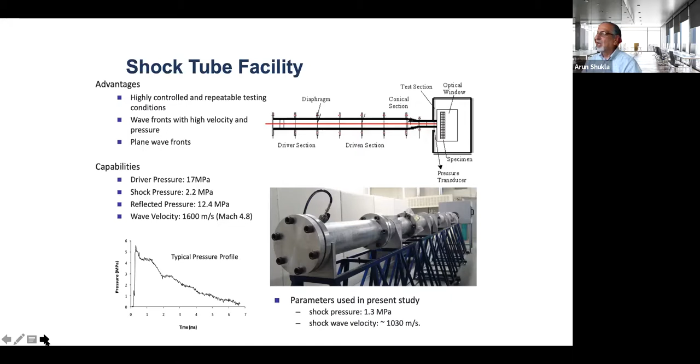In the next slide, this is a video, I hope it runs here. I think in this video, this is a shock tube on the right-hand side. This target is a sandwich composite that we were studying, with two companies involved - one was Material Science Corporation and then the 3TEX Corporation in North Carolina. Material Science Corporation is in Pennsylvania. We were looking at how we can improve the performance of such sandwich structures for naval applications.

I'm not sure whether we can run this video from control here. I think if you click on this image, it should run.

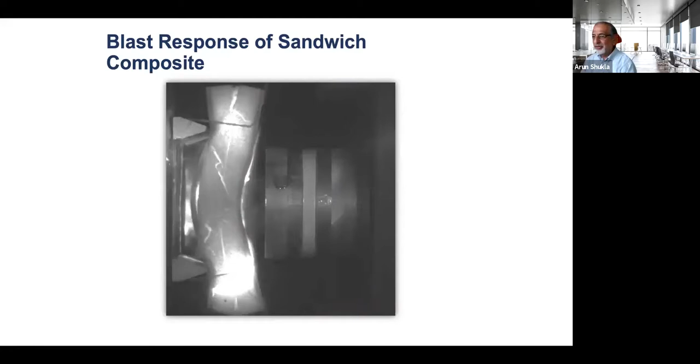Just click on there, it should run. You'll see a shock coming from the right-hand side. You see this glow here, shear cracks forming, delamination, and finally the sandwich structure falls apart.

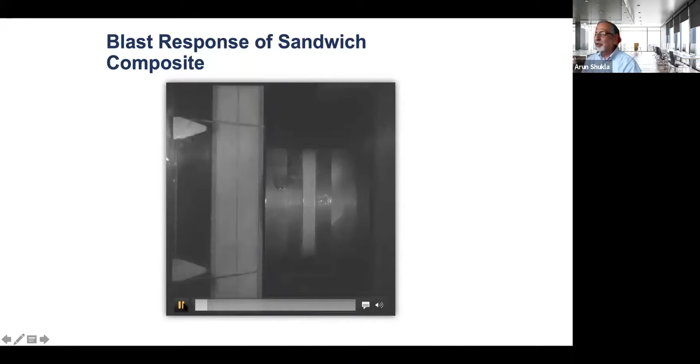What I wanted to point out is that when the shock comes and hits this target, you have very high temperatures. That's why this air ionizes and begins to glow. With this high-speed photography incorporated here, we can really probe the structure in a lot of detail and try to design it.

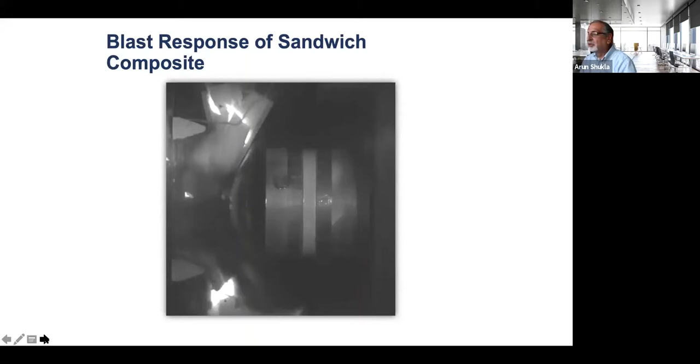We designed a structure with funding from ONR and for these companies that is probably one of the best I've seen around the world. So with this, let's go to the next slide.

We have in our lab some of the highest speed cameras you can think of, cameras that can take 200 million frames per second. We bought a system of cameras recently that can do 10 million frames per second at very high resolution. So we have those kinds of capabilities in the lab to do unique work for our defense agencies, particularly Homeland Security, ONR, and Air Force are interested in this kind of work.

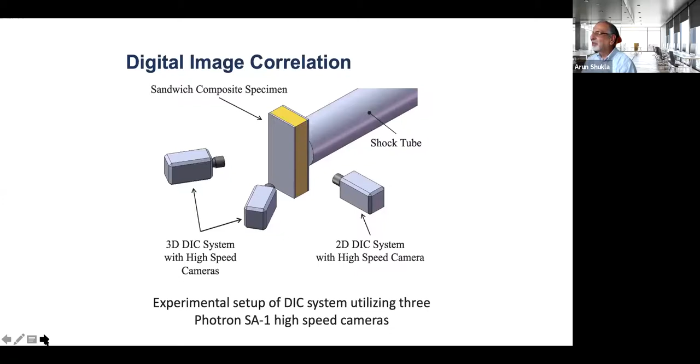Similarly, we can create low temperatures also in our facilities here. Okay, we'll go to the next slide.

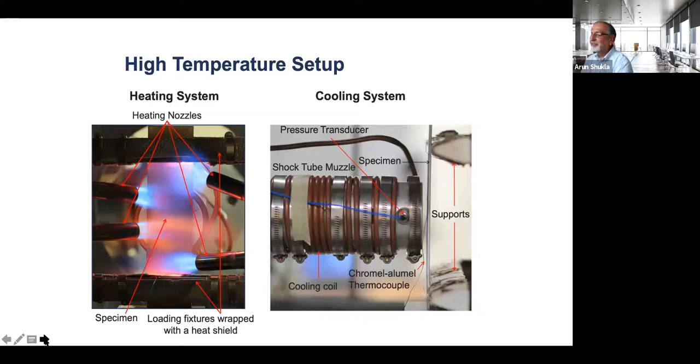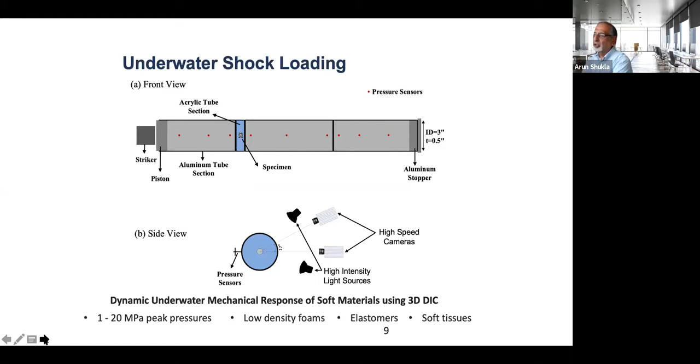We have this facility also. We are currently using it for studying materials for the Office of Naval Research and Naval NUWC here. But we also have a project from the Medical Research Facility of the Navy looking into soft materials. These materials could be foam materials or could be biological materials like tissue and hydrogels and things like that.

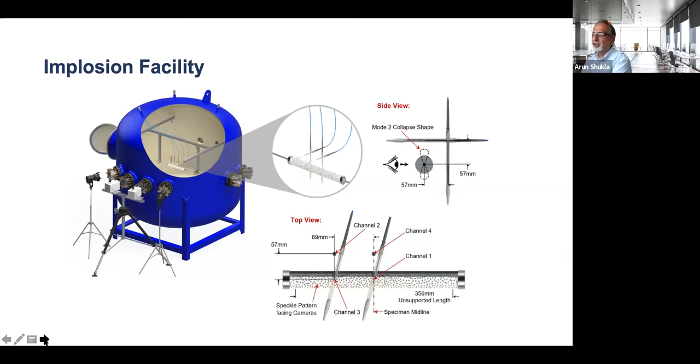If you go to the next slide, you will see that a little bit better. This is an image of an implodable, and Eric would appreciate this. This is a tube made of composite material that, as you increase the pressure and take it underwater deeper and deeper, it implodes.

With these dots that you see here, these help us in probing the structure in real time and help us design these structures in a better way. I'm going to stop at this point and let Helio take over from here, okay?

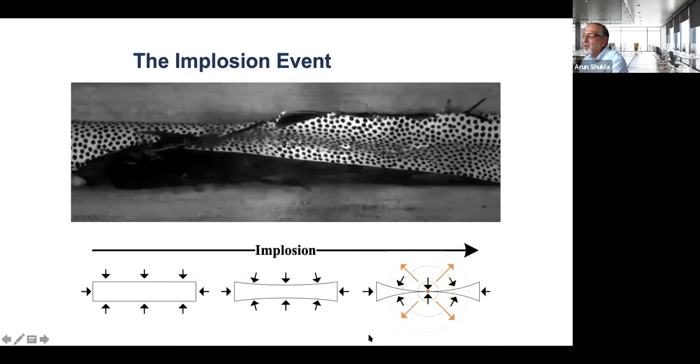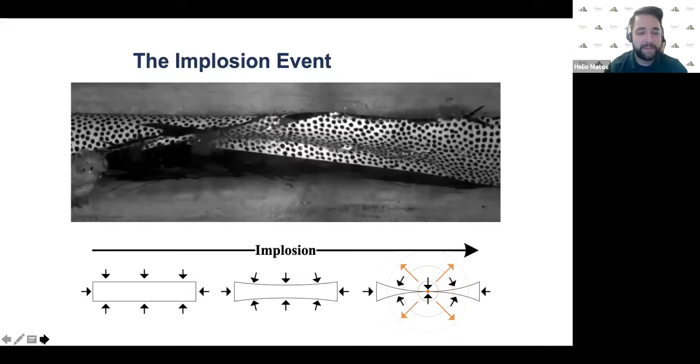So I'm just going to continue the discussion that Arun Shukla started, and I'm going to talk about some of the additional facilities we have in the Dynamic Photo Mechanics Lab.

This one shown on this slide is the split Hopkinson pressure bar. What this does is it allows us to test specimens under very high strain loading conditions. This is the facility mentioned earlier that can get up to 10 to the 6 strain rate, conditions that mimic the rate of loading of asteroids. What's shown here is a specimen in compression between two bars. We have a striker bar that sends a pressure pulse that interacts with the specimen, which is sandwiched between the incident and the transmitted bars.

But we also have the same pressure bars that can do tension and torsion experiments. In addition, we can have specimens cooled or heated between negative 40 Celsius and 1,200 Celsius for metallics.

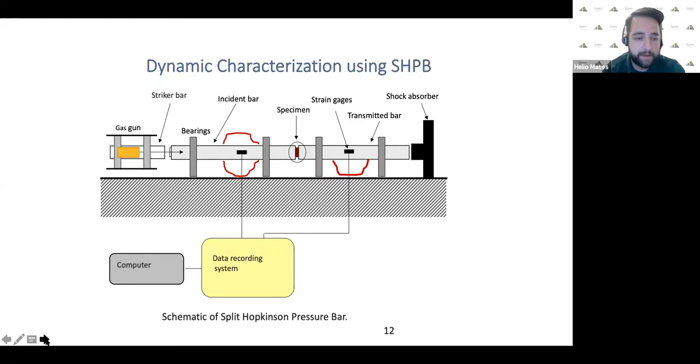In this next slide, we are showing one of our newest facilities. This is an impact tower tester. This is a stock photo, but the facility we have in the lab also has an environmental chamber within the striker. This is for compression testing, and we can move the striker between 1 and 20 meters per second. We can also do temperature testing between negative 40 Celsius and 150 Celsius, so the entire environmental chamber would be within that temperature.

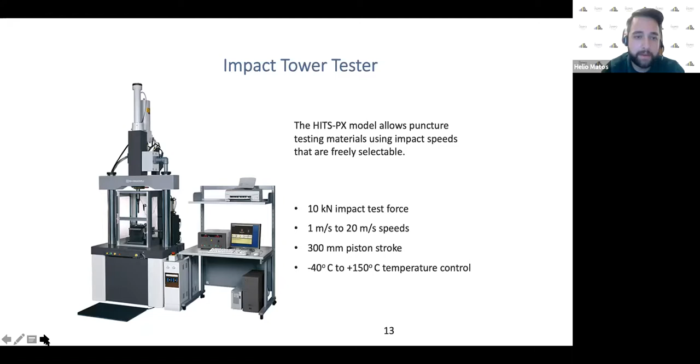In the next slide, this is an image of one of the previous projects we had with the Army, where we're designing armor material. The material shown here, though not in great detail, is a composite with a sandwich core. What you're seeing is a still image of the bullet right before it makes impact with the composite. So we also have the capability of doing ballistic experimentation in the lab.

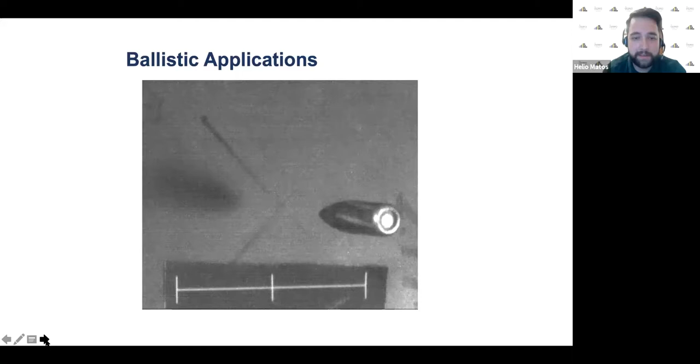In the next slide is our two weathering facilities. The first one, shown on the left, is an ultraviolet weathering facility. We place our material in there to simulate exposure to sunlight at an accelerated rate. The acceleration rate depends on the specific material we're testing. But what we can also do, shown on the right, is accelerated weathering through water infusion of salt water.

This diagram shows a multitude of variations of this facility. The one shown here is just for when we place the specimen in a saline solution. Typically we have it at 3.5% sodium chloride, which is about the average salinity of the oceans around the world. We have heaters that heat deionized water to keep the saline water at a constant temperature. The temperature we set this to depends on the material.

Typically we stay below the glass transition temperature so we're not changing the mechanical properties by introducing very high temperature. At the same time, we want to be as high a temperature as we can below this transition zone so we can get higher acceleration rates.

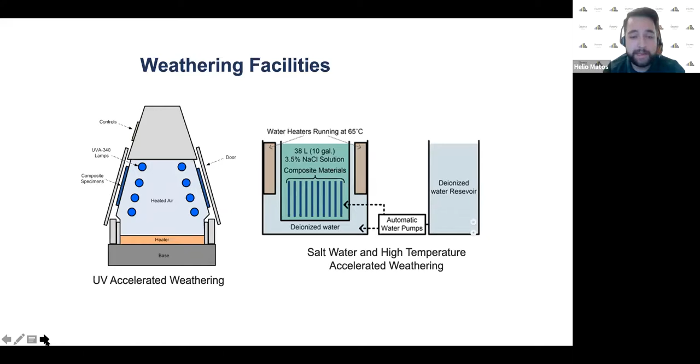On the next slide, we have another variation of the saltwater weathering facility shown here. We have the same saltwater bath, and this large stainless steel canister is where the specimen sits inside and is pressurized. So now we're introducing another variation that would increase the absorption rate, allowing us to get even higher acceleration rates while still staying below that glass transition temperature.

So instead of mimicking 5 to 10 years within a month, depending on the material, we could mimic something between 10 to 20 years or even higher if we let the material soak in this water for longer.

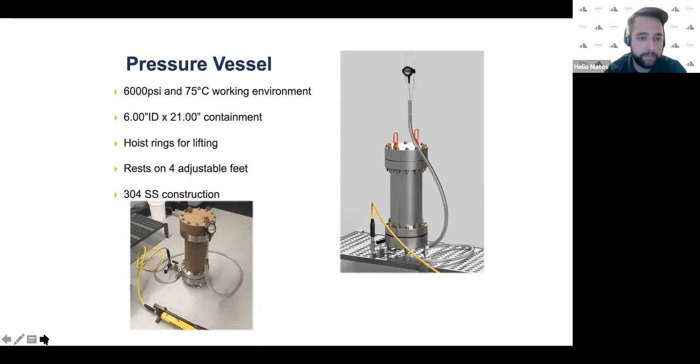In the next slide, we have another piece of equipment added recently to the lab, a dynamic mechanical analysis machine called DMA. We can do material characterization between negative 150 C and 600 C. Also, the loading rate is up to 200 hertz, and what that translates to in terms of strain rate depends on the geometry of the material. But we can essentially do a strain rate sweep.

So we can start at quasi-static loading and go up to 200 hertz, and that would give us a dynamic performance of the material, and we're getting stiffness as well as any viscoelastic behavior of the material. And this complements the split Hopkinson bar, because we're getting only the elastic properties of the material there, whereas the split Hopkinson bar mostly gives us the large deformation or plastic deformation of the material. So between these two equipment, we can get a robust material model for a wide range of temperatures and loading conditions.

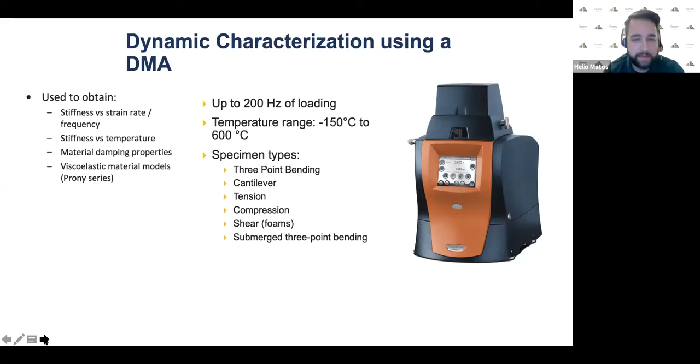In the next slide, we can also do some composite manufacturing in our lab, mostly at a smaller scale than many of the companies that are here. But for experimentation-sized specimens, we could make our specimens, then test and characterize them ourselves. We can do vacuum infusion using fabrics and liquid resin, or also just use prepregs. Right now we're mostly doing flat specimens, but we can also make tubes by roll wrapping prepregs, or curved specimens if there's a mold for it.

And I think that sums up most of the capabilities in the lab. We do have some variations of many of these equipment.

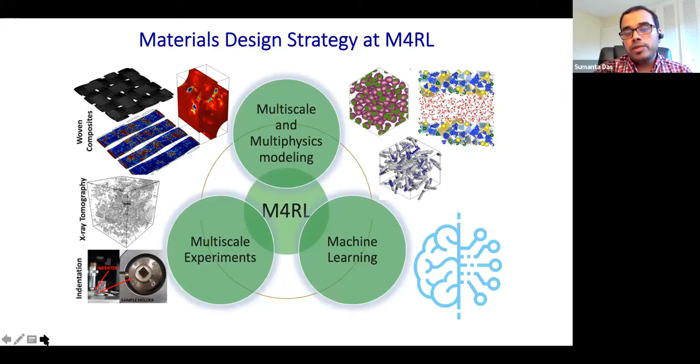In this slide, I have tried to summarize our materials design strategy in M4RL. It has three main integrated components. The first is multi-scale and multi-physics modeling, where we model multi-physics behavior at various length scales spanning from atomic scale to large macro scale. We perform analysis for thermal, mechanical, electrical, and various combinations such as thermomechanical, electromechanical, and thermo-electromechanical analysis. In addition to modeling, we also perform various multi-scale experiments. Overall, we follow an integrated modeling, experiment, and machine learning based approach to material design, where each of these three components mutually inform and advance each other. In the next slide, I'll show some recent work examples of these three components.

In multi-scale modeling, we perform analysis at multiple length scales, starting from atomic scale to nano, micro, meso, and macro scale. We adopt different techniques at different length scales to increase the efficiency of material design.

At atomic scale, we implement molecular dynamics and density functional theory. In the middle scales, we can apply peridynamics, discrete element method, finite element analysis, etc., depending on which problem we're tackling. At the large scale, we perform finite element analysis and extended finite element analysis, or XFEM, if we have crack propagation or if we're trying to model the post-peak behavior of composites.

Generally, composite materials show different structures at different length scales. So if we zoom in at different locations at different scales, we find different structures. We can tweak these material structures at any of these length scales, and that will reflect in the macro scale performance of the structure made from composite.

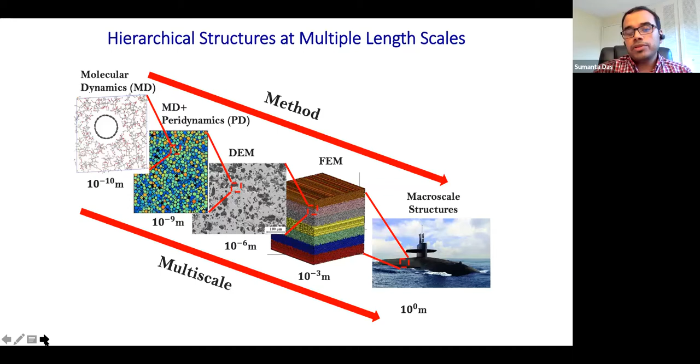So we tweak different material structures and material properties at different length scales and come up with the optimized design. That is how we implement multi-scale analysis in our materials design process. In the next slide, I'll show some examples of multi-scale simulations to make this clear.

So here I'm showing the examples of different simulations, multi-scale simulation at different scales. We can see the atomic structures at atomic scale.

At micron scale, we apply composite micromechanics. We do mesoscale modeling, working on woven textile reinforced composites. And at the same time, we also model macro scale performance under different types of loading conditions.

All these scales are interlinked and they mutually inform each other, advance each other, give feedback. That's how this whole integrated approach works, where we link all these different length scales and finally go to the macro scale for performance evaluation of the material.

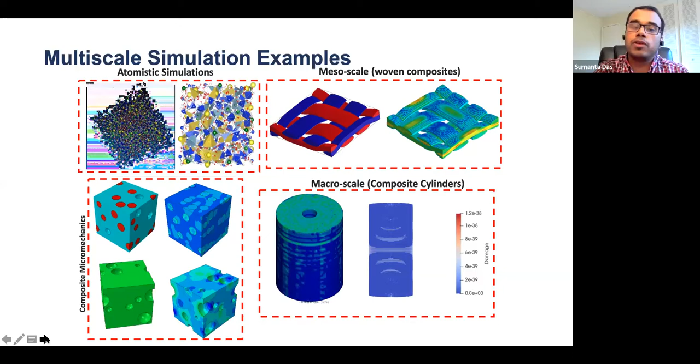The previous slides showed the multi-scale simulations or computational modeling approach. Now, in the next few slides, I'll be showing multi-scale experiments that we perform for our material design studies.

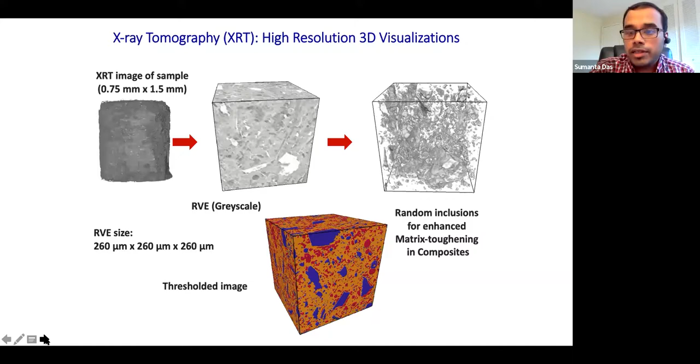These micro indentation experiments help us evaluate the micromechanical behavior of composites. The results also serve as input for modeling because we obtain the component properties for any composite through this indentation. We have a diamond tip that indents different phases within the composite and gives us the behavior or performance of those intrinsic phases in the composite.

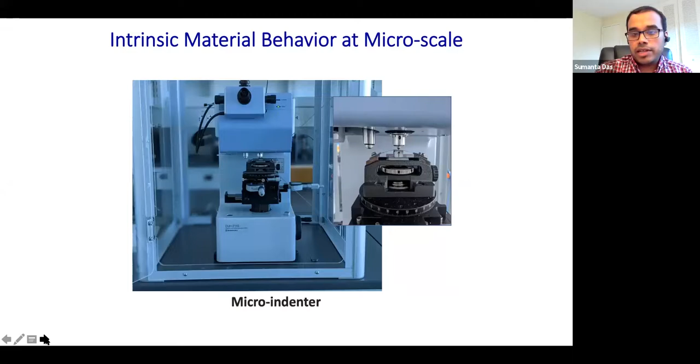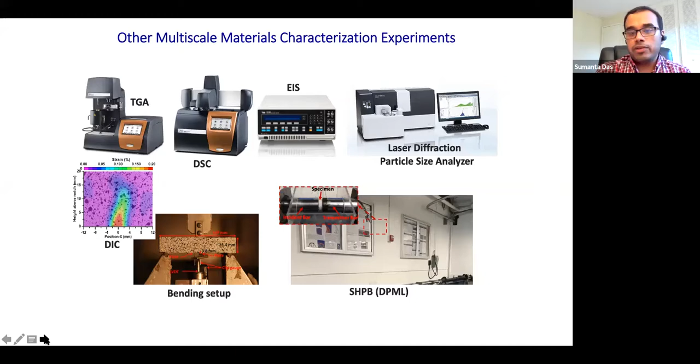For the large scale, these were all small scale experiments, and for large scale experiments such as split Hopkinson pressure bar, shock tube, and other experimental facilities previously shown, we directly collaborate with DPML to evaluate the macro scale performance. Our collaboration with DPML completes our overall strategy of experimenting on the material structure at different length scales—micro, nano, meso, as well as macro.

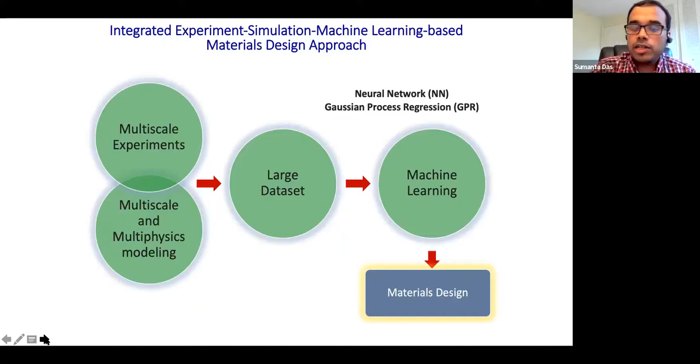In the next slide, I'll show two of our recent industrial projects that we collaborated with DPML on. The first one is recent work we did for Goetz Composites, where we designed composite pressure vessels through our combined multi-scale and experimental approach in collaboration with DPML. We designed these to withstand full ocean depth pressures, almost 9,000 or 10,000 meters depth. The other recent work was with Nautilus Defense.

Here we have designed a smart composite for health monitoring. These are the two recent examples of our collaboration with industry, done with DPML, and we collaborated with Helio and Professor Shukla.

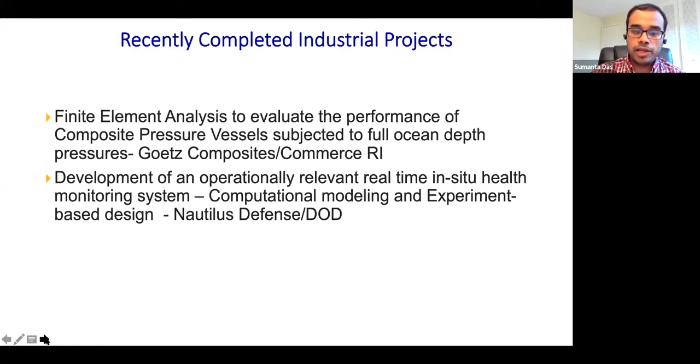In the next few slides, I'm going to explain some of our ongoing research works. These are only the ones I'm mentioning, related to composites, but we are working on other materials as well. These are some portions of our overall research effort in the lab.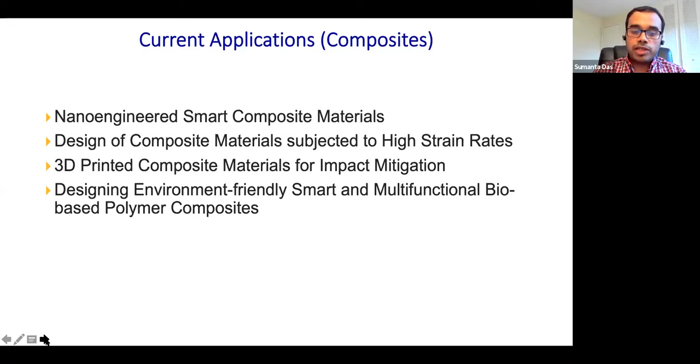We are working on nano-engineered smart composite materials, design of composite materials subjected to different types of high strain rates, 3D printed composite materials for impact mitigation, and also designing more environment-friendly, smart and multifunctional, bio-based, 100% plant-based polymer composites. These are four of the works we are working on right now, and I'm going to explain some of those briefly in the next few slides.

The first field we are working on is nano-engineered smart composites. This is a paper we recently published in Composite Structures, in which we placed carbon nanotubes at different strategically placed hierarchical length scales to achieve good strain sensing efficiency. On the similar line, we are also developing other nano-engineered composites from this combined experiment, modeling, and machine learning based approach.

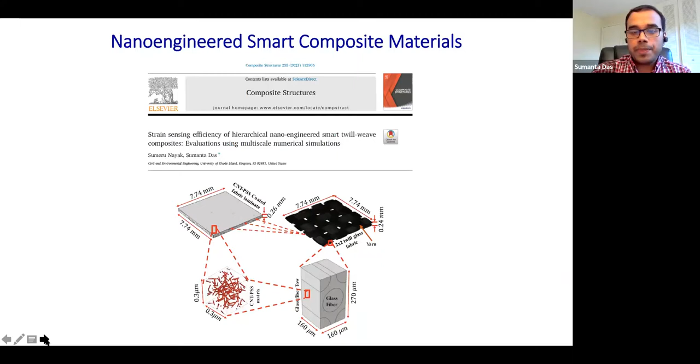We are also working on designing composites subjected to various dynamic loading conditions, directly collaborating with the Dynamic Photomechanics Laboratory. In the example I'm showing here, one of our ongoing works, we are designing composite cylinders for underwater shock loading. The design is performed by probing the hierarchical structure of the composite, generating large data, and performing machine learning, while getting experimental input from DPML. That's how we have this integrated approach to design these composite cylinders.

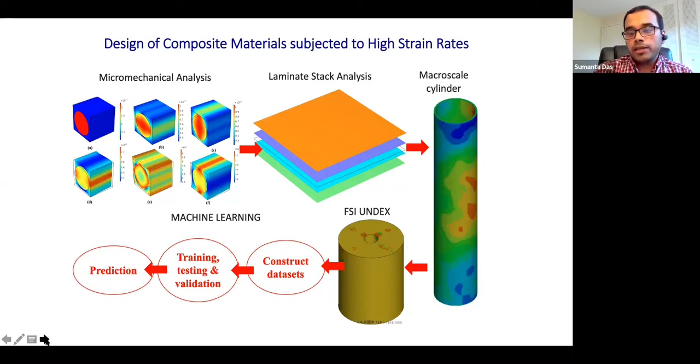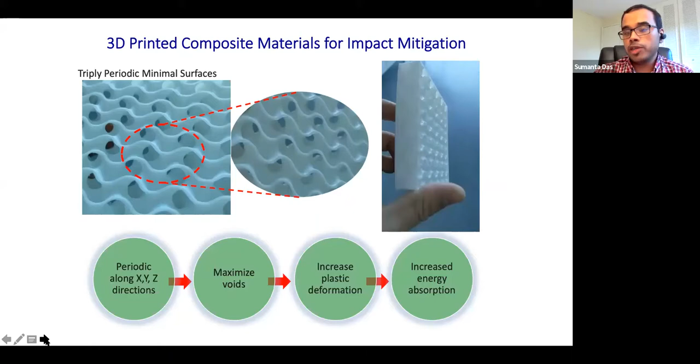We are also working on 3D printed composites for enhanced impact mitigation. Here I'm showing some of the core materials we are printing with different composites, which will be used as core in sandwich composites. These core materials are developed so they can give enhanced plastic deformation and energy absorption, so we can optimize their impact mitigation characteristics.

So another interesting topic that we recently started working on is 100% bio-based composites that are developed from renewable resources with eco-friendly manufacturing processes. These materials are fully biodegradable. We are investigating how these 100% bio-based composites can be engineered to enhance their engineering performance for more commercial scale applications.

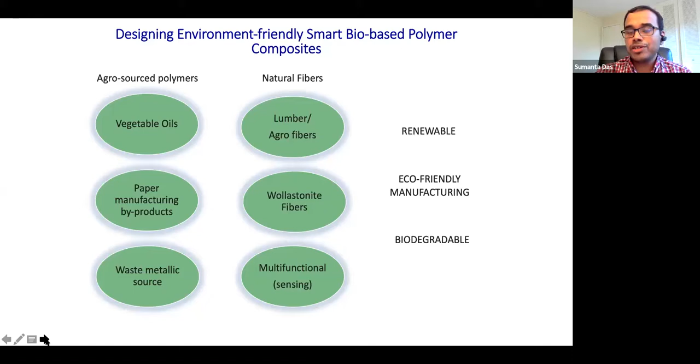If my panelists could unmute yourselves and turn your screens on, that would be great. Susan, why don't we bring the slides down so we can have their faces up. I'm going to start with Catherine Flynn, who joined us at very last minute notice and also has to leave to run to another meeting. Catherine Flynn is the Executive Director of the University of Rhode Island Business Engagement Center. Catherine, could you give us an example or two of... oh, don't have sound yet, hang on. Okay, there we go. All right, thank you, I couldn't unmute myself. I think you guys have the controls. Yes, we have control on that.

Can you give us an example or two of successful research collaborations between a company and URI? Sure. For those not familiar, the University of Rhode Island Business Engagement Center is about 8 years old now. We modeled it after the University of Michigan, who had started their Business Engagement Center maybe 10 years ago in their engineering school. So it's appropriate that we're talking about engineering here. Engineering colleges in general and industry tend to have very good symbiotic relationships, and that's no different here in Rhode Island. Over the years we've had a lot of great partnerships with our industry partners. Some have already been mentioned by our faculty members, who, as they were talking, I realized are way smarter than I am, with a lot of really fantastic stuff going on.